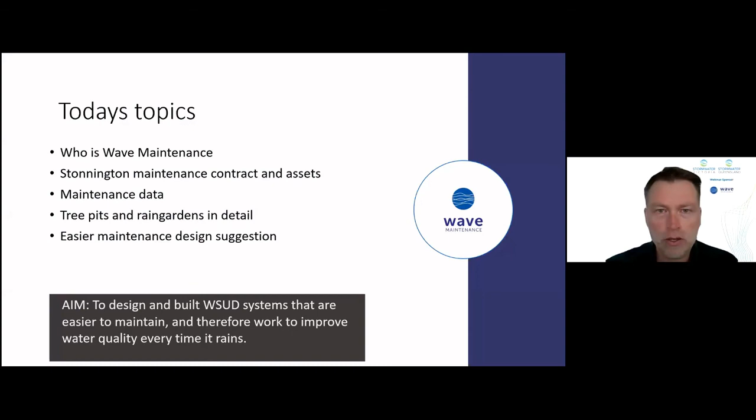Certainly we found that design has improved over the last 10 to 20 years, and also the way we build systems generally is better, although I still run into contractors that are building these WSUD systems for the first time, and they really don't get simple basics like water needs to flow downhill. So we're still grappling with that, but then maintenance is the other thing: how to design and build them so that they are easy to maintain, and we'll go through some of the details as to what that literally means when you're down on your hands and knees trying to clean these systems.

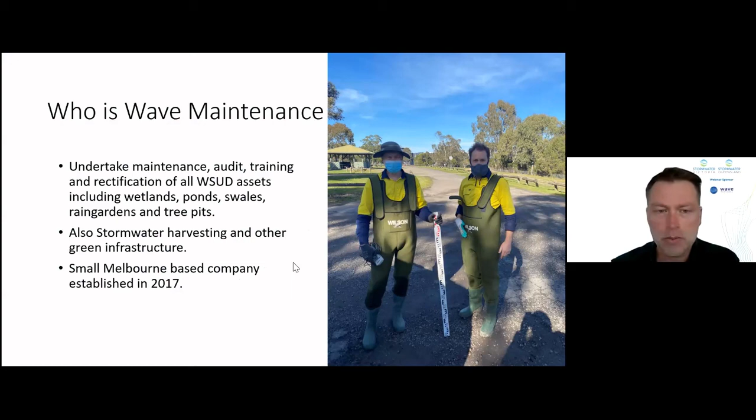So who is Wave Maintenance? So it's Rob and I and Derek. There's Rob and I in our COVID gear, about to do an audit on a wetland system with our lovely waders. As Rob mentioned, we've been around for a couple of years. We mainly do maintenance, but we also do auditing and training and rectification of these WSUD assets, including ponds, swales and rain gardens. We're also currently maintaining a couple of stormwater harvesting systems for councils, and we've rectified one or two of those over the years as well.

Again, Rob mentioned that we started this a few years ago by having discussions between ourselves and Derek, and really we saw a gap in the market for doing good WSUD asset maintenance. There's very few specialist companies out there that we've seen that have WSUD maintenance as the core of their business. It's the main thing they do. There's quite a number of companies that do it as an add-on to their general landscape and streetscape maintenance, but it's just one or two people out of 100 that might do it for 1 or 2 days a week.

The other problem with the industry, not a problem, but it is something that needs to be acknowledged, is that it's generally low paid. It's highly transient. As people build up their skills, they apply them somewhere else where they're better paid.

And you know, it's a relatively low skill base needed, but you still need to know exactly what you're trying to achieve with these listed assets, in terms of that water does need to come in, that sediment does accumulate, and you need to take it away, otherwise they don't work. And it's more than just having some plants that look good in a garden bed. There are other functions below the ground in terms of the sand that needs to be unclogged. The outlets need to work, and particularly the inlets, as we'll discuss.

We do acknowledge that in terms of wetlands and bushland maintenance, which is quite an overlap, there is a good skill base there, but there isn't in that streetscape tree pit and rain garden maintenance. So hence why we created this company.

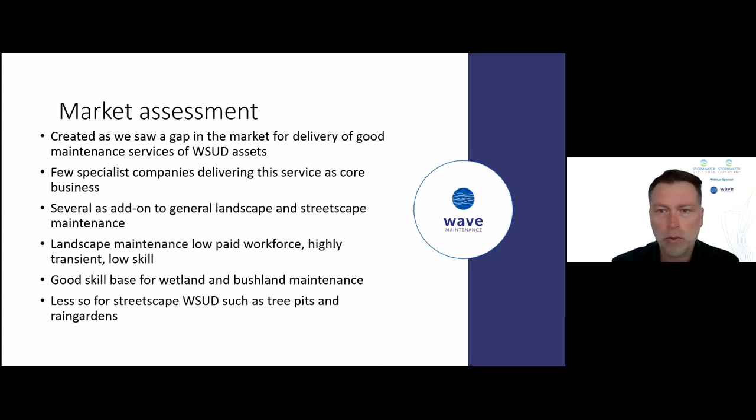Who do we see as doing WSUD maintenance? So in Melbourne in particular, but from what I've seen and heard in other states, New South Wales and Queensland, it's not too dissimilar. A lot of councils do it in-house, generally through their horticultural team. Or the arrangement is that everything's external contractor, and there'll be one head contractor, either a civil or parks area, and a company like ours or some other might be underneath that head contractor maintaining these systems. That's if they get maintained at all, which is another problem in itself.

The big issue is that these assets, as most of you will know, have both civil and drainage elements and horticulture. And that's not often within the same division within a council or within a contract. So it could be spread anywhere from 2 to 4 different divisions or contract areas, from the plant and the soil being in horticulture, pits and pipes being in that civil drainage area, trees are often separate again if they're in the system, and litter and street cleaning might be another area separate. So it could be quite a number of contracts and areas that are spanned by these WSUD assets.

And very few, and in fact we only know of Stonington as being the only one, have a specialist contract that covers WSUD assets. The beauty of that is that you can get specialists like ourselves in who really focus on making these systems work. We look at both the plants and making sure they're healthy and happy, but also making sure the water gets in, that the filter media is not clogged, that the inlets are open, that the outlets are functioning as they should, that water's getting through the sand, through to the bottom. So we're looking at all those elements as part of the maintenance system and doing both civil and horticulture at the same time.

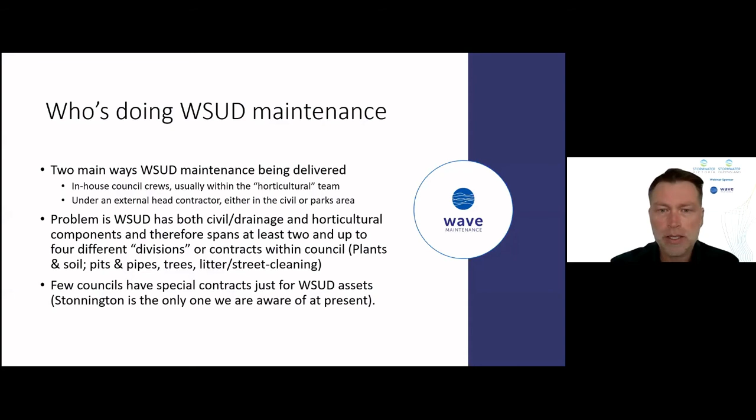In terms of looking at the particular of Stonington, for those of you who don't know where Stonington is, it's an inner Melbourne council, just borders the Botanic Gardens on the west and all the way up to Chadstone on the east, Yarra and Gardiners Creek on the north, and the Princes Highway on the south, suburbs of Toorak, Prahran, Malvern, those sort of areas. As mentioned, the assets within Stonington are between the 5 and 15 year mark.

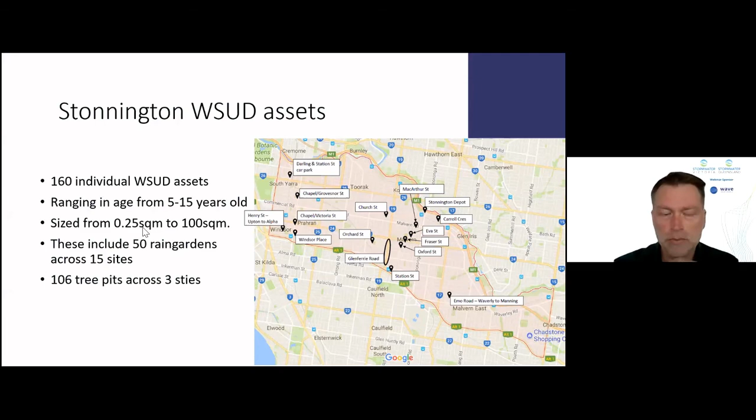They've got 160 individual assets spread across the municipality, as you can see on the map there, from tiny systems of the tree pits in Glenferrie Road to slightly larger systems. About 50 rain gardens across 15 different sites and 106 tree pits across 3 sites. I've got to say that a bit more than 90 of those tree pits are all in Glenferrie Road, and you'll see why there's so many. They're the tiny ones. They're the quarter of a square metre size system.

The contract in itself, for those that are interested, and I have had questions as to how we arrange these contracts, how people arrange these contracts and what's in them.

In the Stonington one, there's a quarterly maintenance for all the rain garden assets and the tree pits, involving weeding. In particular here it's hand weeding, no herbicide to be used, which has an interesting side benefit: when you're hand weeding a plant, you're pulling it up by the roots and taking a clump of sediment with you. So you're kind of de-sedimenting the system at the same time, which is kind of good. Where if you're just using herbicide, that sediment and root mass stays there. And you get by-kill of beneficial plants as well, whereas hand weeding, there's a risk of pulling out some germinants, but you're not killing large plants.

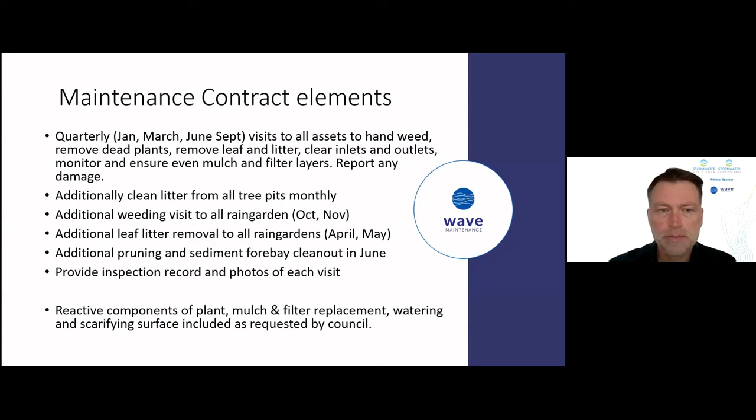And to their credit, they had some dollars that they could spend on it, and it got to a point where it actually got quite a large contract. So they RFQ'd it, and we were lucky enough to win that contract. So that reactive component hasn't been used except for the rectifications, but they spent $30,000 on that rectification, so it was a separate contract in itself. We started the contract back in 2019. The year prior to that, we went for it and lost on price.

In preparation for both these contracts, we thought it was good due diligence to have a look at the systems and give them a mini audit, so to speak, just to see what we're getting in for. And both times we noticed that the sediment levels were quite high and the inlets were blocked, so they weren't really treating water. And I'll talk to that as being the main issue that I see with these systems, and any rain garden system or tree pit that we audit, that sediment blocking inlets is generally the #1 issue that stops them from working. So we were awarded the contract back in May 2019, and we've been doing the contract for more than 12 months now. It's been extended to October 2020, and then it'll go out to market again, and hopefully we'll win it for another 12 months or so.

When we started, given the high levels of sediment accumulation and the inlets being blocked on pretty much all the systems, we spent some extra time in May and June to unblock those and to get the water flowing back into the systems, make them work as WSUD systems, without doing a total reset, because that was beyond scope and budget. And also you'll see that compromising between doing that and the existing vegetation. I'll talk to that over the next couple of slides.

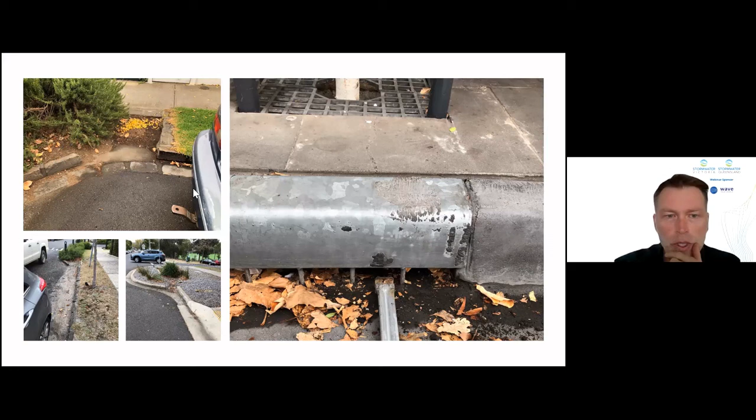This one, again, it's hard to tell by the picture, but this gutter stone is sort of 10, 15 centimetres high, and the soil behind it is at the same level. So water's running into this area and then jumping over to the footpath, running on the footpath before it's getting into the rain garden here.

Here are a couple of examples of what we did in that first month in terms of cleaning out those inlet areas. The vegetation's looking quite healthy. It's growing really well in the sediment and the organic matter that's composted and accumulated on top of the rain gardens. So we dug a trench as much as we could to get water in without compromising the vegetation around the sides, but allowing water to get in. And this is the area we clean now.

Same with this system here, where upstream of here, there's that same mulch material, that rock mulch on quite a slope. It tends to run into the gutter virtually every rain event, and over the 3 months it accumulates to this level and needs to be removed, as we've done here, to allow a bit of that water in. This system here has undergone some rectification, so we'll see it again in some later slides.

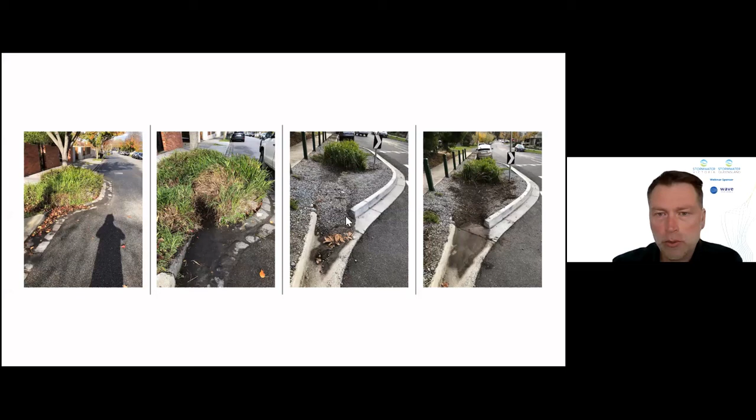We looked at the filter, the media, we did litter collection, we did sediment collection, how much of those did we take out, what are our thoughts in terms of rating of the vegetation, the inlets, the outlets, etc. So all that's done on the spot while we're there looking at the system. We can also link photos to that system, and in the background, every time we say submit, the data gets collected in a spreadsheet and it's there.

And later on, just to make it a bit easier to see, rather than a big spreadsheet, after a few months you've got lots and lots of data there. Each month, we actually break it up into a single spreadsheet and send that to council, and they keep that at their end. From discussions with council, they're finding that a good, simple, straightforward way of visualising the data, and they're able to store it, rather than having hard copies that they might scan in and have as a PDF somewhere. I guess it also gives them an ability to analyse the data if they wish.

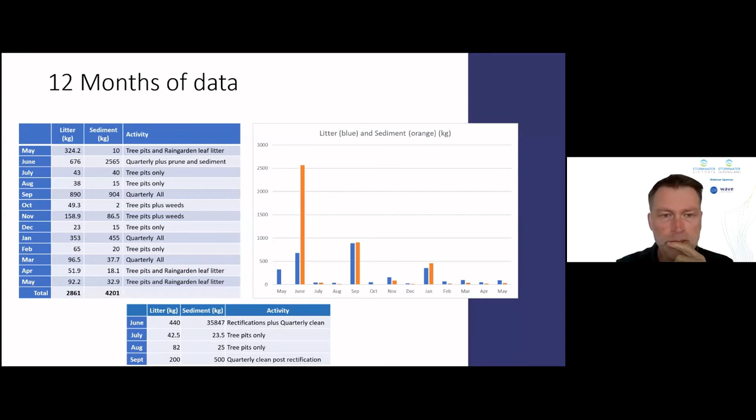Now I'll jump to looking more in detail at both the tree pits and the design, some of the pros and cons and the nuances of a tree pit, and same with the rain garden. Principally focusing again on the Stonnington systems, but also branching out to other systems that we've seen that we don't actually maintain, but look like they're easier to maintain in the way they've been designed and built.

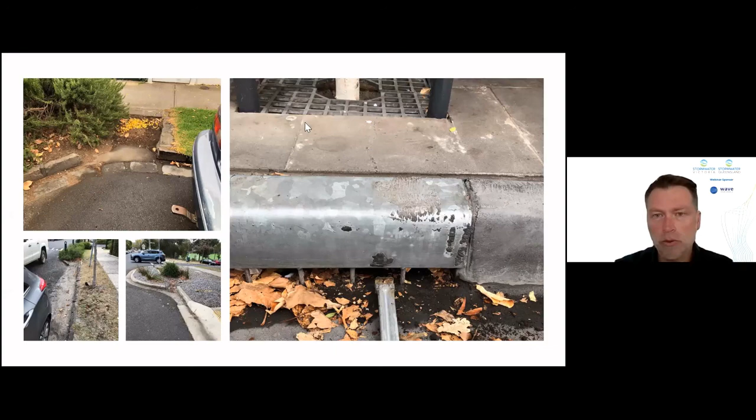Most of them don't have this flap behind the inlet where you can lift it up and get access immediately behind where most of the sediment and litter is accumulating. So this was a great add-on that makes maintaining these systems much, much easier. In the other systems where this is a solid paver, you're left with scraping material through the front with your fingers, or I'll just quickly scroll up to here where we've got this little gadget where we basically shove the material back through to the tree and dig it out from around the tree.

The only downside is when they installed these, they didn't leave quite enough tolerance on some of them, where the flap is actually very, very stiff, and some of them we can't move. So having a bit more space when they get installed through the gaps around the edge, or not pressing the concrete around, because as it dries and expands, it really clamps that metal, which has a little bit of give.

The other two systems have quite heavy grates on them, and we see this a lot when we've ordered other systems where we're conscious of the load of traffic near the trees in terms of being able to take a truck across them. I would argue that you don't want a truck this close to a tree, so having this bit of grating here, there's the gutter here, the tree, and then there's the road, so a truck shouldn't be able to get in here.

These are cast iron, so they're very heavy to lift up. These ones are a bit easier. They do have lockdown lugs, which again just get in the way really. They're a bit heavy to lift, so it's a bit of a challenge. And the lugs are useless, so I wouldn't even bother using them. We don't use the lugs to clamp them down.

Anything like that just makes this a two-person lift, so that again adds time and OH&S issues, and just having to lift these up every time and put them back adds a good 10 to 30 seconds each time. Doesn't sound like much, but it does put that little bit of a hindrance there in terms of cleanability and people wanting to lift this up and take the material underneath. And I'll show you the consequence of not cleaning it out.

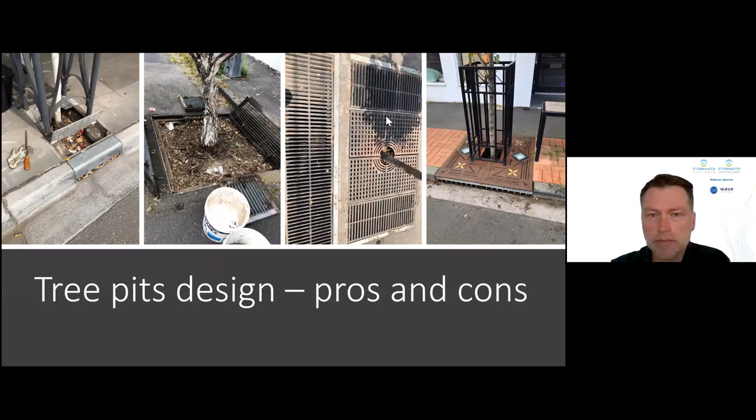In terms of the cleaning issues, it is getting down on your hands and knees, getting down on your belly to reach in. So that's one OH&S issue. We thought we might need to do this when traffic on the road is less. I found personally it's actually counterintuitive where parked cars actually protect you. You just got to check that there's no driver in the seat every time you kneel down. But they actually provide a bit of protection

as long as they're not parked straight in front and the wheels blocking this entryway. Whereas if it's a clearway, and it is on one side at 7 a.m., you've constantly got to look behind you because you do need to get basically in front of these grills to, as I said, pull the material this way or shove it further in. So that's certainly a consideration. When there's a flap here, it's a little bit easier to do it from the footpath side. And I talked about the heaviness of these grates, having to lift them up to get the material that's gotten through the gaps and accumulated around the base of the tree.

Here's what I was talking about before. When you don't remove this regularly, at least every quarter or annually, you'll see there's sort of a whiter material underneath here. That's the clean sand underneath the accumulated sediment and the composted leaf litter that's on top. And you'll see a bit of a depth here. It's a good 150 to 200 down from the top. So when it was first built, there was that extended detention. Over the years, that material hasn't been removed.

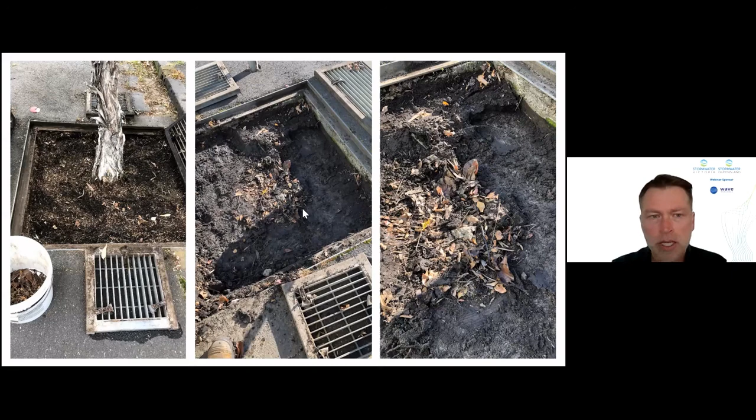What are the common litters that we're finding? Leaf litter is one of the main things that we're picking up all the time. Some sediment as well, but leaf litter is quite the load, probably more from a volume perspective rather than weight. There are some rubbishy bits that we pick up. But again, in Glenferrie Road, leaf litter is a fair bit of the material that's in the front. The real interesting thing is hair.

You see some fuzzy bits in this photo and here as well. Hair seems to be, particularly in Glenferrie Road, something that we pick out a lot. And my theory around the hair is also that it binds with the leaf litter and the sediment to create this nice barrier across the top, sort of a felting effect, and gets caught around these bars that go down.

So being a busy shopping strip, lots of people, we lose hair all the time. That's my theory as to where it comes from. And we find it because we're cleaning it out more regularly, and I find it probably adds to the issue of that barrier being caused here and getting caught around these bars, these vertical bars.

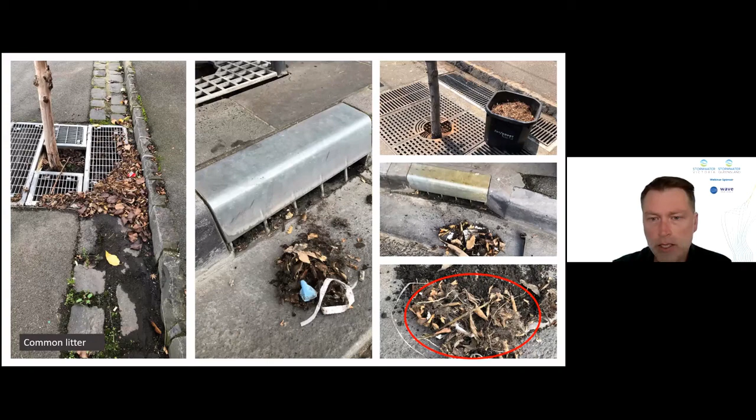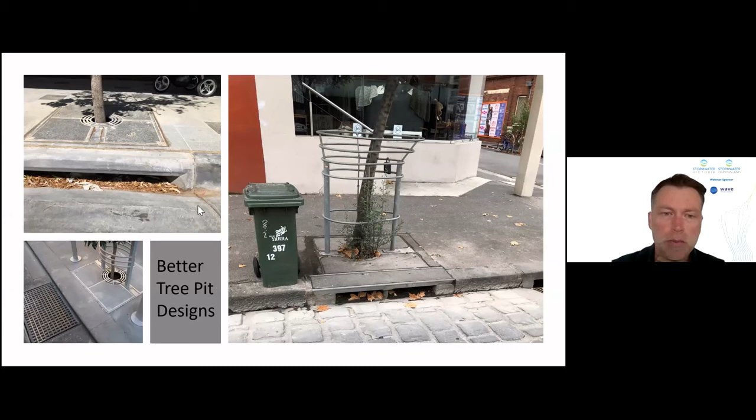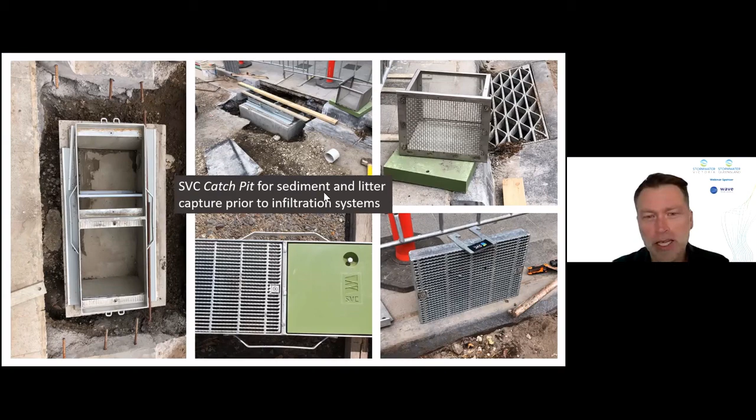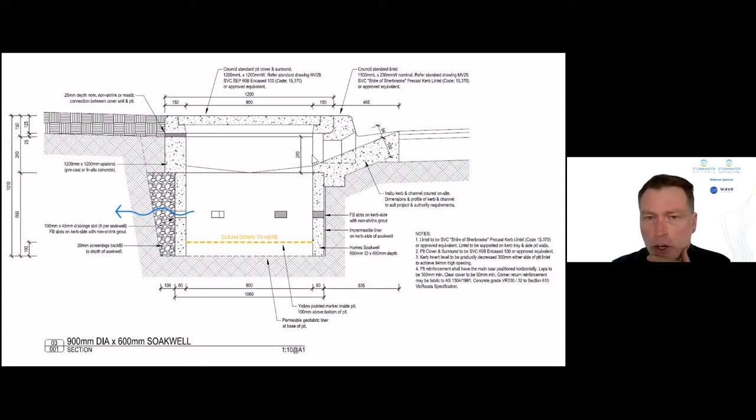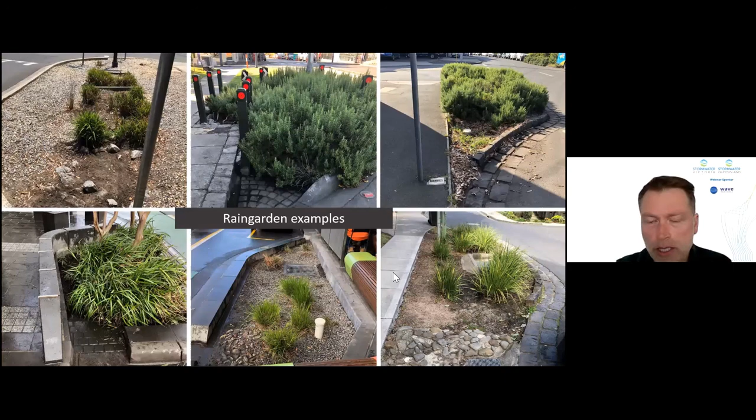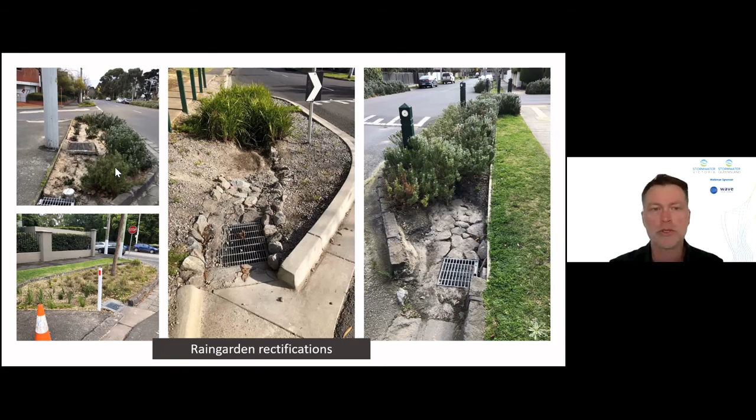This is one of those rain gardens that was full of rosemary, and we took some of the rosemary out from the filter area to allow more water to get in. And the rosemary drops a lot of needles that do have to be removed as well and accumulate over time. And this is again in September where we're digging the sediment out of each one of these pits. So even over that 3-month period, most of them were half full of sediment and leaf litter.

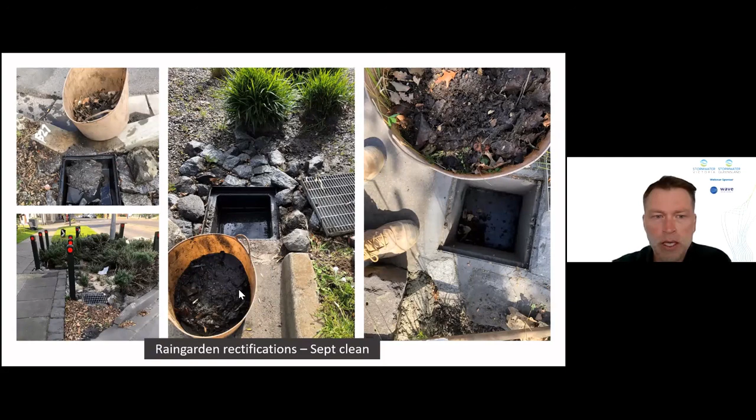A couple of inlet options that I like. This is in Banyule. This is a bit easier, even though it's rock. It's level rock, it's smooth rock, so it's easier to sweep and scoop the material off. This is the same rain garden out at Montmorency train station, but at the other end, where it's the complete opposite. You've got these huge boulders that we had to pull out by hand and dig out the sediment in amongst these gaps. This took maybe 2 minutes to clean. This took an hour or two. Quite a difference.

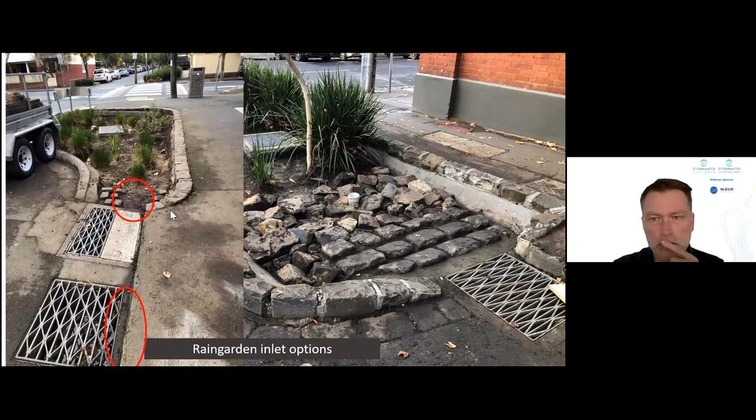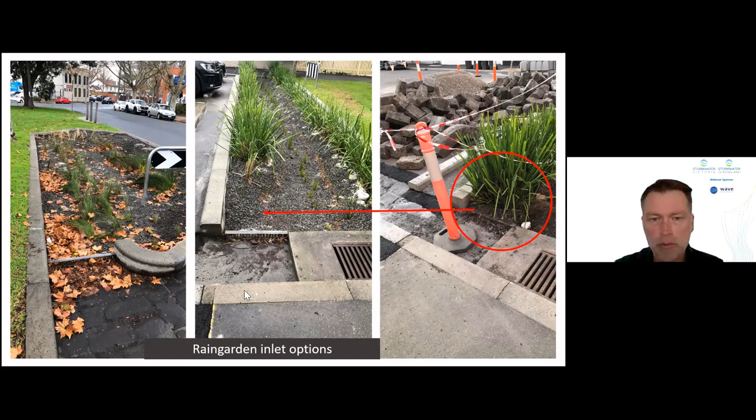Two others here. You notice here the lomandra that's missing grew really well and basically blocked up the inlet, so that had to be removed. And these grates work okay as long as they're cleaned very regularly, because as soon as they clog up, this area fills and then spills over the top or back to the outlet. And another slight execution issue, where this pit, good idea, but placed 2 centimetres too high, and water runs around rather than through and into the rain garden.

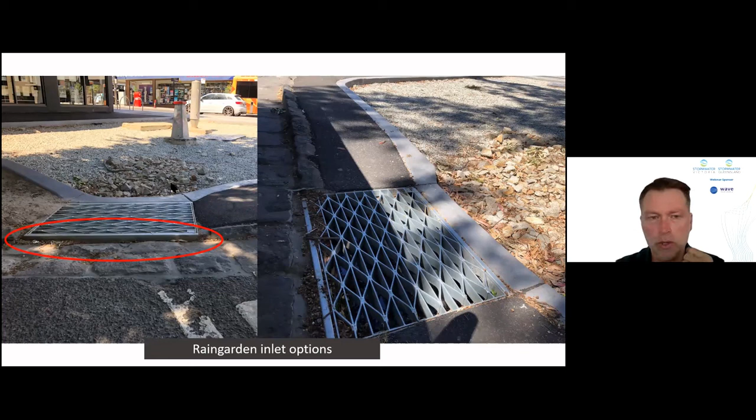So in terms of the design, I think we're getting a lot more right, but with the execution we still need to be very careful with levels, and the tiniest difference means that water's not getting where it's supposed to. So in summary, leaf and sediment are the main pollutants, and they block inlets really quickly and need to be removed regularly. Sediment traps at inlets make it easier to clean. Shallow pits are best, or flat concrete forebays, not rock riffles. They're a nightmare to clean.

Something that I probably haven't mentioned is rock mulch. We use that a lot, but sediment gets in the gaps of the rock mulch. Once the sediment's accumulated, this rock mulch has to be removed with the sediment to unclog the system. So you're turning something that might have been 1 mil into 10 mil into 40 mil, and quadrupling the volumes of material that need to be taken to landfill.

That material can potentially be recycled where we screen out the rock mulch from the sediment, but it's a lot of extra work in terms of taking material off site. As I mentioned, tree pits should have nice clear openings and easy to lift lids to make them easy to clean out. And I do acknowledge through the audits that we've done, and various systems I've seen over the years, generally weeds are managed well, and litter as well, but sediment is the thing that's not being managed on any system that we've audited particularly well.

And you've got to say, whether it's intentional or not, a clogged inlet means it's easier to maintain because there's less litter and sediment getting in, so there's less material that needs to be taken out. So it's extra work and is almost a disincentive for the maintenance people to clean the inlets, but it needs to be done for them to work like a WSUD system rather than turning into an ordinary garden bed that has nice looking plants.